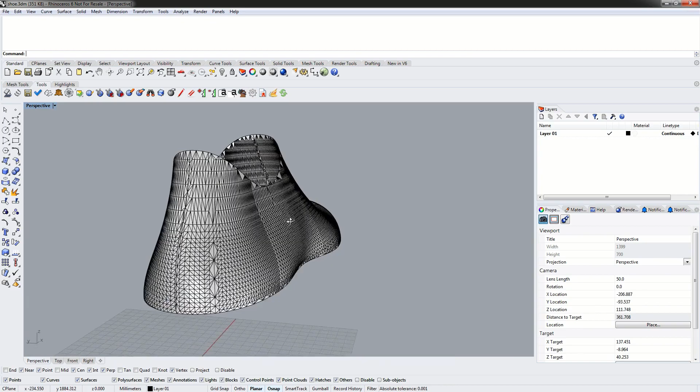To begin, we'll have a look at the uniform remesher. We're going to be working with this simple shoe model. As we can see, it's been meshed by Rhino, so we've got a fairly large collection of high aspect ratio triangles here. So these are triangles where one edge is very, very long, but another edge on the triangle is very short. So those are high aspect ratio triangles.

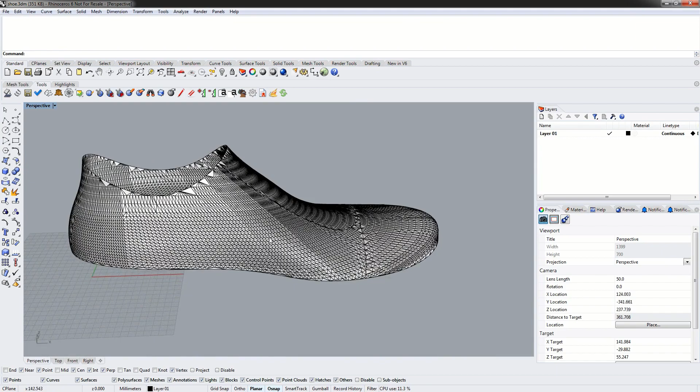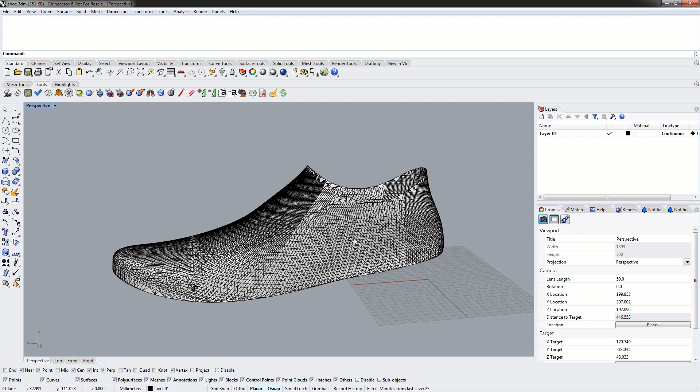We also have some larger triangles down here on the planar surfaces. And we also have some fairly small triangles, especially when we come to the cut lines. So some of these triangles can get fairly small. So what the remeshers do, both the uniform and the adaptive remesher, they are going to scan the topology of the mesh, and they will create a new mesh over top of the original that preserves the detail and the fidelity of the mesh, but the key characteristics of both are that all the triangles are going to be more or less equilateral, and we're going to have a reduced vertex and triangle count.

So to begin, we'll switch to the Mesh Tools tab, and we're going to use first the Uniform Remesher. So we'll start the tool. We're going to rectangle select all the meshes, press enter on the keyboard to accept the selections. We're going to adjust a couple of the controls. We're going to first sew all the meshes together. We're going to respect the seam boundaries during remeshing, and when we're done, we're going to unsew.

So sewing is going to basically join all the meshes together. Respecting the seams is going to respect the existing divisions between the meshes, and unsew is basically going to explode the mesh back into the same number of pieces that we started with. We're also going to delete the input so we don't have two meshes over top. So before I start adjusting the fidelity percents and the output parameters, we're going to go ahead and click Start, and we're going to have a look at the results.

So very quickly, we're creating a new mesh over top of the original. The shape is still very much recognized as a shoe, but we've essentially reduced the triangle count, and this is very noticeable when we start looking at the toe. We've gone from a smooth toe to a very angular toe. So the largest contributing factor to this would be the desired vertex count. For the uniform remesher, the biggest control is the desired vertex count, and this is how many vertices are going to be shared amongst all meshes selected.

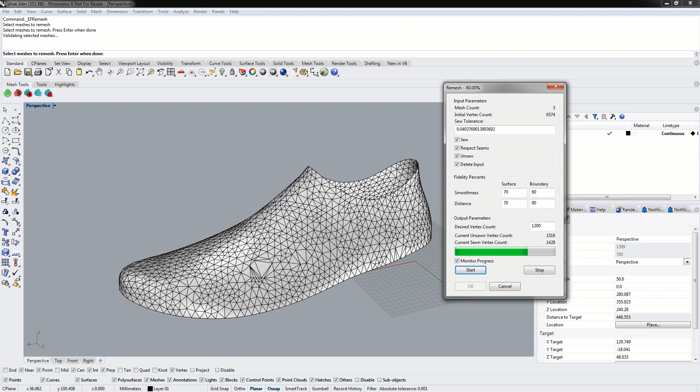So for this one, I'm going to change it from 300 to 1200. We're going to click Start again, and we're going to see a new mesh appear. So very quickly, we're going to start remeshing, and already we can see that we've got much more detail around the toe. It's much rounder, and the shoe's looking a lot better. So 1200 vertices for something like this results in a fairly decent looking mesh, and for this I think this would be a good result.

We can also control the results of the remesher by adjusting the fidelity percents. So probably the most important ones would be the boundary percentages. So this is going to be the amount of difference allowed between the original boundary of the original mesh and the boundary of the remeshed mesh. So it's important that you don't change these really any higher than 90–95%. If you set them too high, you're over constraining the remesher. It's not going to be able to make the changes required to adequately decimate your mesh. So generally speaking, 90% is about the maximum you want to set these.

Lowering these even more is going to allow the remesher to forgive or overlook additional detail, so you might want to lower those values if you're working with a very noisy mesh, perhaps something from a laser scanner that has a lot of noise in it, and that's going to allow the remesher to smooth out that noise. But generally speaking, the desired vertex count is the parameter that you're going to be changing. This is going to make the most difference in the quality of your mesh.

We'll have a look now at the adaptive remesher. So we'll click the adaptive remesher in the toolbar, and we're going to rectangle select all the meshes and press enter on the keyboard to accept the selection. So right away, our controls are different, and the most notable change is we no longer have a desired vertex count. The adaptive remesher works differently.

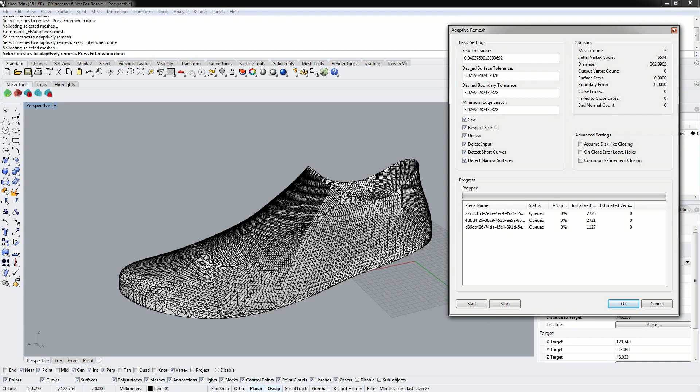So the adaptive remesher will automatically scale the number of vertices required to produce a new mesh that meets these constraints. So before we start adjusting these, I'm going to click the start button and we'll have a look at the results. So very quickly it's going to analyze the mesh and it's going to start creating a new mesh. So we can already see that we've got a mesh very similar to the Uniform Remesher, but a couple key differences are the triangle sizes are going to scale.

So we're going to end up with different triangle sizes with the adaptive remesher, and the reason being is it's going to scale the number of triangles to meet the number of triangles required to preserve detail in the mesh. So around the toe we're going to have more triangles here than we will along a planar surface around the back here. Same with up here around the heel area. We have more triangles up here to preserve detail that was found in the original mesh, and it's going to scale the triangle size to preserve that detail.

So for both uniform and adaptive remesher, we're ending up with a reduced triangle and vertex count, which is very desirable for ExactFlat, and we're also ending up with triangles that are more or less equilateral. But the two biggest differences between the uniform remesher and the adaptive remesher are the parameters used to control them. With the uniform remesher, we specify a target vertex count, but with the adaptive remesher, we specify maximum allowed distances between the old mesh surface or boundary and the new mesh surface or boundary.

So we can adjust the number of triangles produced with the adaptive remesher by adjusting the tolerance parameters. Similar to the uniform remesher, the most important one to adjust is the boundary tolerance. This is going to change the fidelity of your cut edge. So we can add more triangles by reducing the boundary tolerance. So for instance, I will change this from 3 to 1.

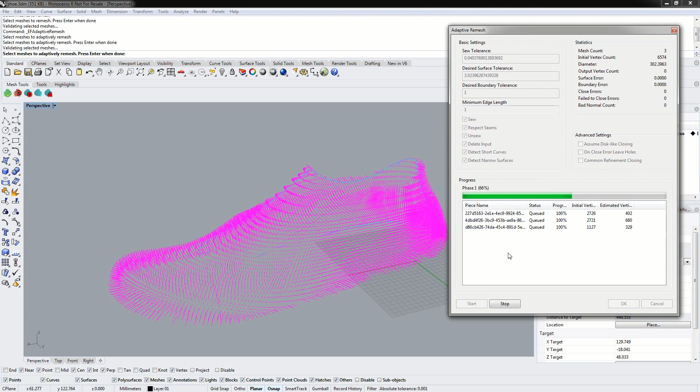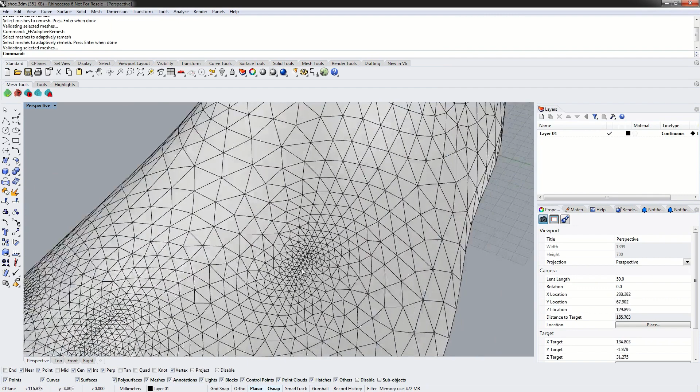So if we zoom in real close on one of these areas, I'm just going to rectangle zoom here, and we're going to go ahead and undo the adaptive remesher. We'll notice that we've got a triangle here that has produced a bit of a ridge. So we can see as we rotate this around, we've got a bit of a ridge or a small detail here that's being preserved by the adaptive remesher.

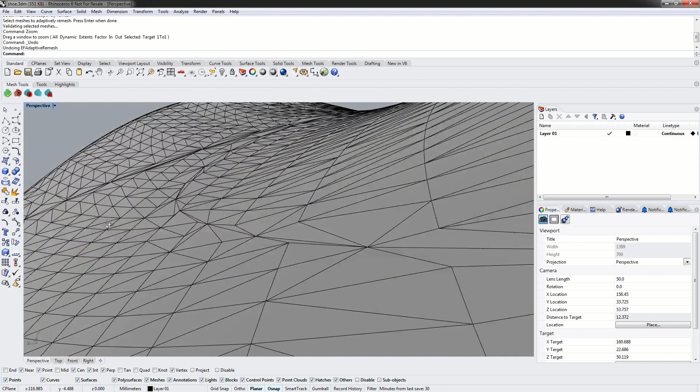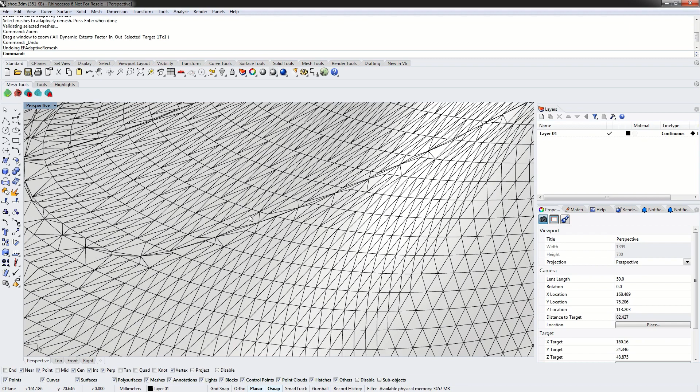So the easiest way to correct this would be to simply delete the triangle and vertex shift this point, or we can split up this triangle. There's a number of ways that we can fix this error, but they're very easy to spot with the adaptive remesher, whereas these errors are either obliterated or not possible to spot with the uniform remesher.

So in most cases, the adaptive remesher is the tool you are going to want to use. It is the easiest to use, and it tends to produce the best results. It's also much quicker to adaptively remesh a mesh than it is to use the uniform remesher. When working with smaller meshes, the uniform remesher tends to artificially inflate the vertex count before decimating and reducing it, just to give it the highest point sample count required to perform its work. So for those reasons, we recommend you always use the adaptive remesher as your go-to tool for remeshing.

Some cases where you may want to use the Uniform Remesher would be when you're working with extremely large data sets that are very noisy. So if you're working with laser scanned data, the data tends to be noisy and pick up micro variations in the surface. These would all be good candidates for the Uniform Remesher. The Uniform Remesher can be used to smooth out micro variations in the result.

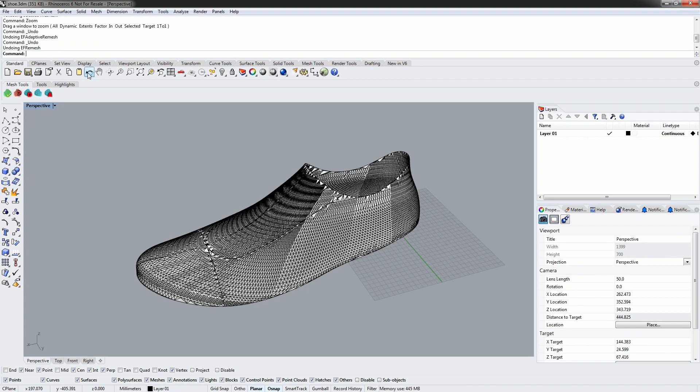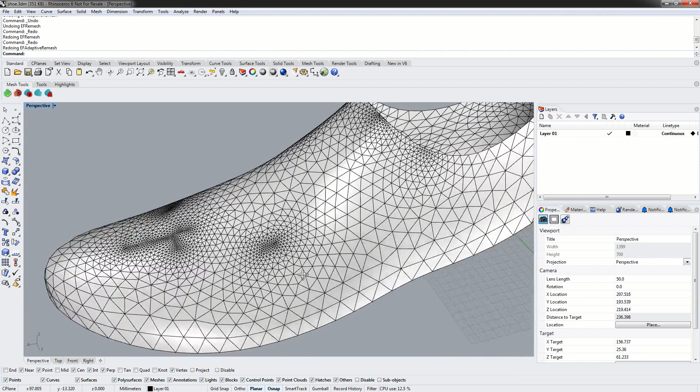So when we compare the adaptively remeshed result here, the adaptive remesher is preserving all these imperfections in the original mesh, whereas the result we got from the uniform remesher did not have these small details, so it tends to smooth out imperfections in the result, and this is desirable for laser scanned models. Uniform remesher is a good choice for data that's coming from very noisy sources such as laser scan data. Otherwise, it's always recommended to use the adaptive remesher.